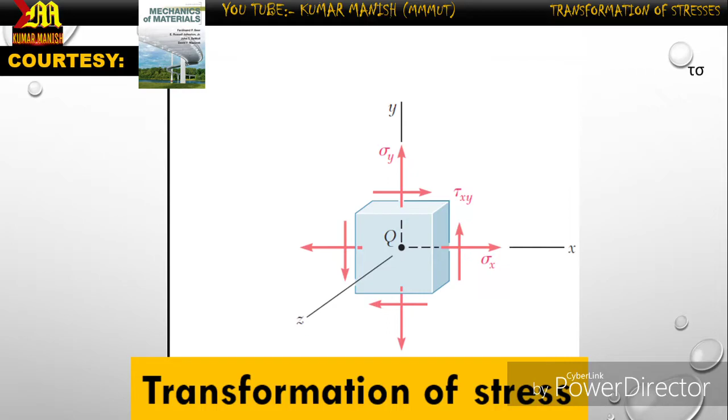हम एक स्मॉल एलिमेंट को कंसिडर करते हैं जो क्यूबिक बॉडी है। अब हम बात करते हैं शियर स्ट्रेस की। यदि हम बात करें नॉर्मल स्ट्रेस की, तो नॉर्मल स्ट्रेस जहाँ भी कहीं एक्ट होता है तो फेस के परपेंडिकुलर एक्ट होता है, और फेस के पैरेलल जब कोई स्ट्रेस जनरेट होता है तो उसको हम बोलते हैं शियर स्ट्रेस। जब हम मोहर सर्किल कंस्ट्रक्ट करेंगे या डेरिवेशन देखेंगे तो उसमें शियर स्ट्रेस के ओरिएंटेशन को कंसिडर करते हैं।

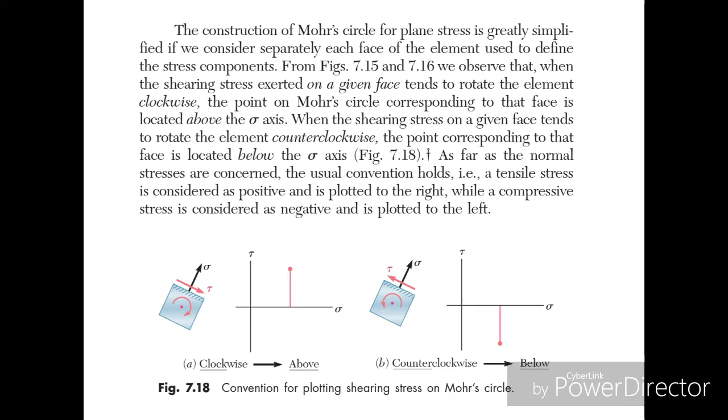शियर स्ट्रेस यदि क्लॉकवाइज रोटेशन में है तो वह पॉजिटिव लिया जाएगा, यदि एंटी क्लॉकवाइज रोटेशन में है तो उसे नेगेटिव लिया जाएगा। टाउ एक्स वाई की यदि हम बात करें तो इसका मतलब होता है शियर स्ट्रेस ऑन एक्स वाई प्लेन इन वाई डायरेक्शन, और वहीं पे टाउ वाई एक्स की बात करें तो शियर स्ट्रेस ऑन वाई एक्स प्लेन इन एक्स डायरेक्शन।

टाउ एक्स वाई सबस्क्रिप्ट में एक्स फेस को रिप्रेजेंट करता है और वाई डायरेक्शन को। यदि हम साइन कन्वेंशन की बात करें तो पॉजिटिव फेस पॉजिटिव डायरेक्शन, तो साइन कन्वेंशन पॉजिटिव लेंगे। पॉजिटिव फेस नेगेटिव डायरेक्शन तो साइन कन्वेंशन नेगेटिव लेंगे। A shear stress is positive when directions associated with its subscript are plus plus or minus minus, मीन्स यदि प्लस फेस है और प्लस डायरेक्शन है तो हम पॉजिटिव लेंगे, या नेगेटिव फेस है नेगेटिव डायरेक्शन है तो प्लस लेंगे। दूसरा केस क्या है कि द स्ट्रेस इज नेगेटिव व्हेन डायरेक्शन आर प्लस माइनस और माइनस प्लस। तो चलिए हम आगे बढ़ते हैं। इसी के साथ बात आ जाती है अब रोटेशन ऑफ प्लेन की।

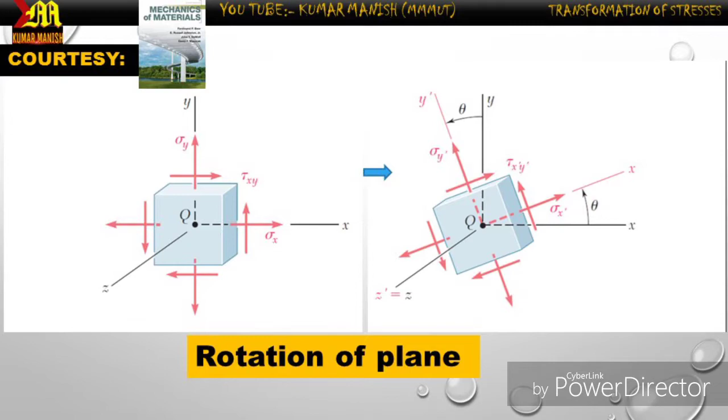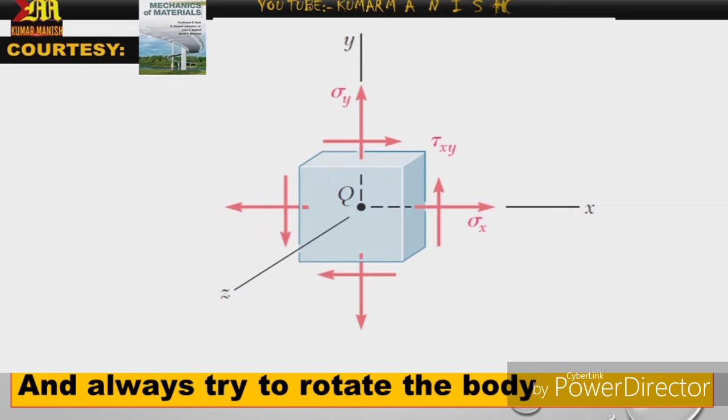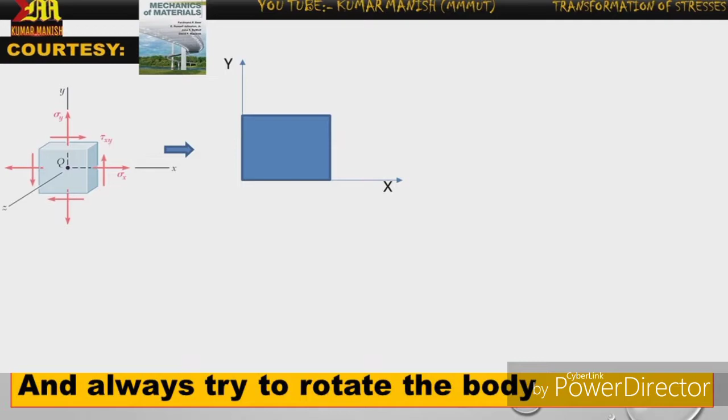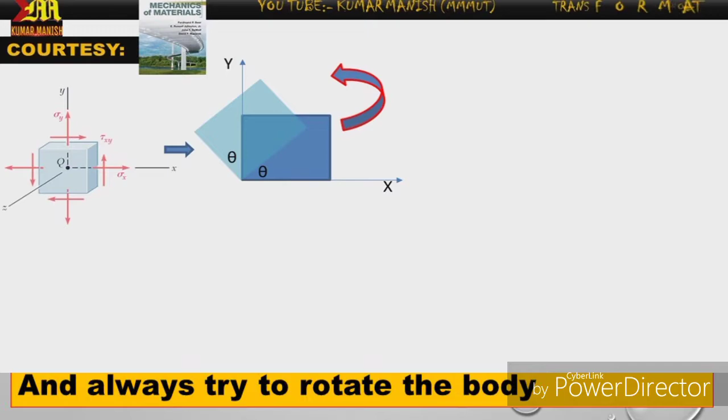यहाँ पे एक्स एक्सिस, वाई एक्सिस और जेड एक्सिस है। चूँकि यह 2D केस है, इसमें एक एक्सिस को, चाहे हम एक्स एक्सिस ले लें या वाई एक्सिस या जेड एक्सिस, किसी एक एक्सिस को हम कांस्टेंट मान लेते हैं। हम अपने इज़ी के लिए हमेशा जेड एक्सिस को ही कंसीडर करते हैं। तो जेड एक्सिस के अबाउट रोटेशन करा रहे हैं काउंटर क्लॉकवाइज डायरेक्शन में। तो जब हम काउंटर क्लॉकवाइज डायरेक्शन में रोटेशन कराते हैं तो हमारा जो स्टार्टिंग पोजीशन था वह एक्स ना होकर के एक्स डैश बन जाता है, और वाई जो होता है वाई डैश पे शिफ्ट हो जाता है। अब यहाँ पे एंगल बनता है थीटा।

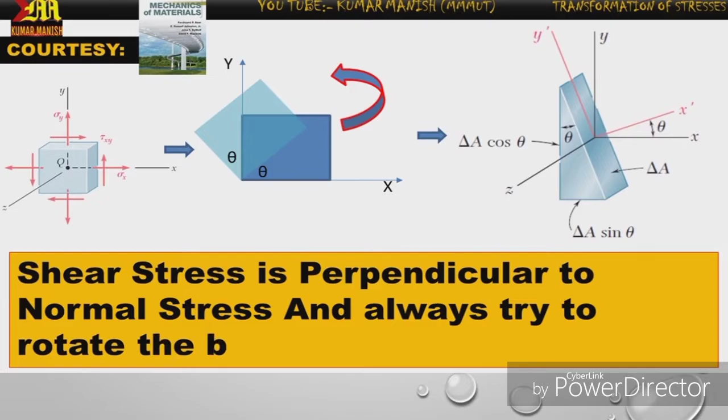अब हम कंसीडर करते हैं कि स्मॉल एलिमेंट को जो थीटा डिग्री पे कटा हुआ है। जब सिग्मा एक्स लग रहा था तो उस फेस का एरिया था ए, लेकिन जब ये थीटा डिग्री पे रोटेट हो गया तो इस टाइम इंक्लाइंड फेस को हम डिनोट करते हैं डेल्टा ए से। चूँकि ये थीटा डिग्री पे है तो इसका जो हॉरिजॉन्टल कंपोनेंट आएगा डेल्टा ए की वजह से, तो डेल्टा ए कॉस थीटा होगा, और वर्टिकल कंपोनेंट जो होगा डेल्टा ए साइन थीटा। अब कंसीडर करते हैं दूसरे पिक्चर को। यहाँ पे तीनों फेसेस पे लग रहे फोर्सेस को प्रेजेंट किया गया है।

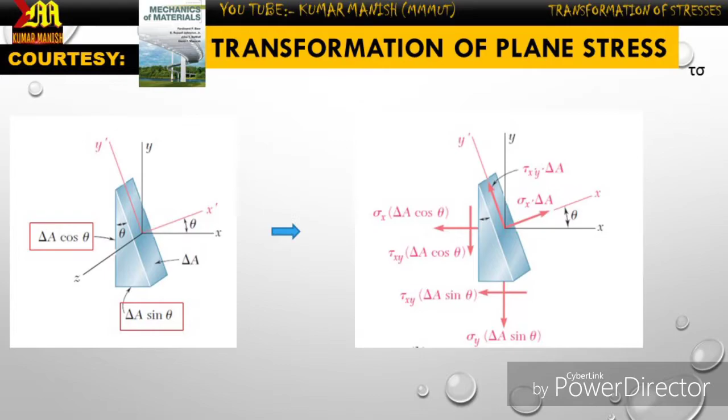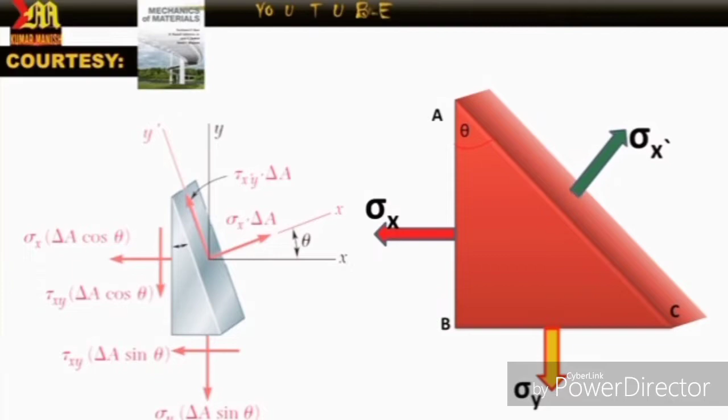फोर्सेस बराबर होते हैं स्ट्रेस इनटू एरिया, नॉर्मल स्ट्रेस इनटू एरिया। अब होगा आपको कन्फ्यूजन कि ये कैसे लग रहे हैं और कैसे रिजॉल्व किया गया है, तो हम इसको समझेंगे वन बाय वन करके। तो चलिए देखते हैं।

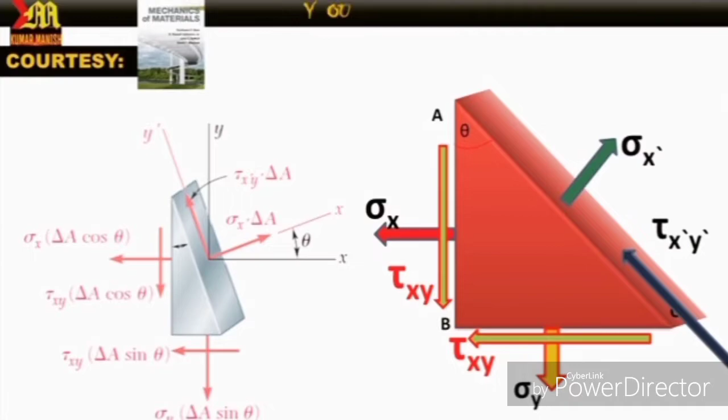फॉर नॉर्मल स्ट्रेस कंपोनेंट लेट अस कंसीडर फेस ए बी एंड बी सी। अब लेफ्ट साइड में लेफ्ट कॉर्नर पे जो छोटा सा इमेज दिया हुआ है, यहाँ पे थीटा एंगल कैसे बन रहा है इसको बताया गया है। अब यहाँ पे आप एनिमेशन शो हो रहा है, एनिमेशन में भी देखने की ज़रा कोशिश कीजिए।

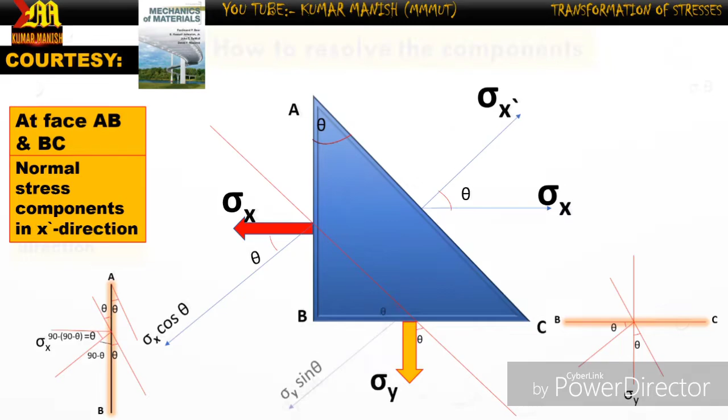यहाँ पे सिग्मा एक्स नॉर्मल टू द फेस ए बी है जो हॉरिजॉन्टल एक्स डायरेक्शन में है। चूँकि यहाँ पे एक्स डायरेक्शन थीटा डिग्री रोटेट होने की वजह से एक्स डैश में कन्वर्ट हो गया है, तो हम जो भी कंसीडर करेंगे हॉरिजॉन्टल, अब एक्स तो रहा नहीं, अब एक्स डैश में कन्वर्ट हो गया है, तो हम जो फोर्स को रिजॉल्व करेंगे वह एक्स डैश डायरेक्शन में और वर्टिकल कंपोनेंट वाई डैश डायरेक्शन में कंसीडर करेंगे।

तो हम देखते हैं यहाँ पे जहाँ पे सिग्मा एक्स कंसंट्रेटेड है, यहाँ पर हम देख रहे हैं कि फेस AC के जो इंक्लाइंड प्लेन है उसी के पैरेलल एक लाइन PQ दिया गया है।

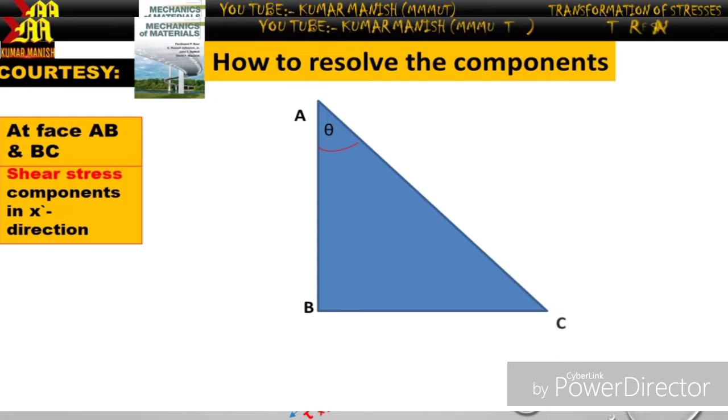Now shear stress components in x dash direction. Here you will see tau xy on the face AB acting downward along the face AB, and tau xy along the face BC. At face AB, tau xy makes an angle theta from the inclined surface AC. Shear stress tau xy acting on face AB in the x dash direction will be the vertical component, with value tau xy sin theta. Similarly on face BC it will be the horizontal component, tau xy cos theta.

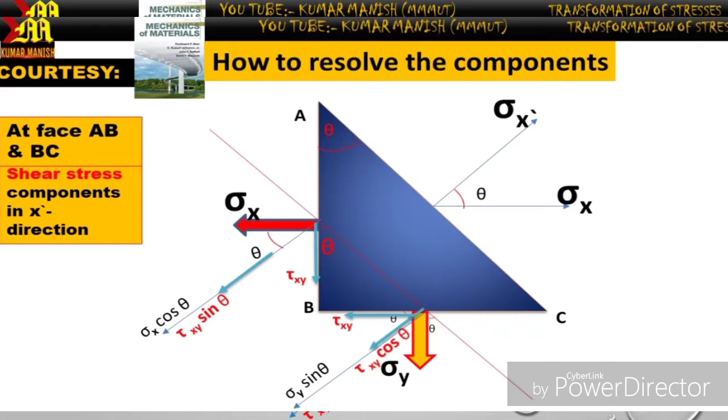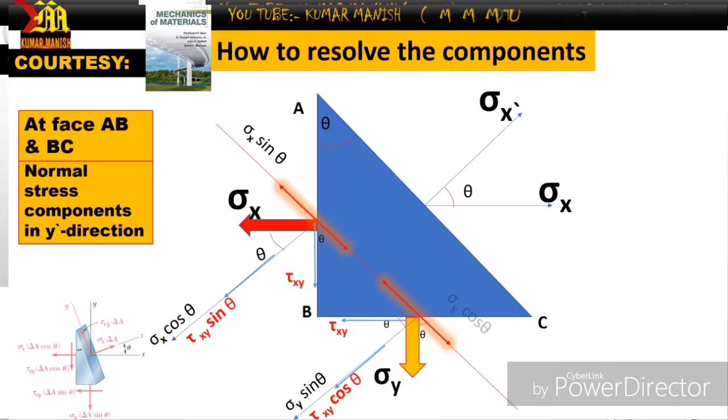Now again, normal stress components in y dash direction. Due to sigma x acting on face AB, in y dash direction it will be the vertical component with value sigma x sin theta. Similarly at face BC, due to sigma y in the negative y dash direction, it will be sigma y cos theta. Let us consider shear stress tau xy components in y dash direction.

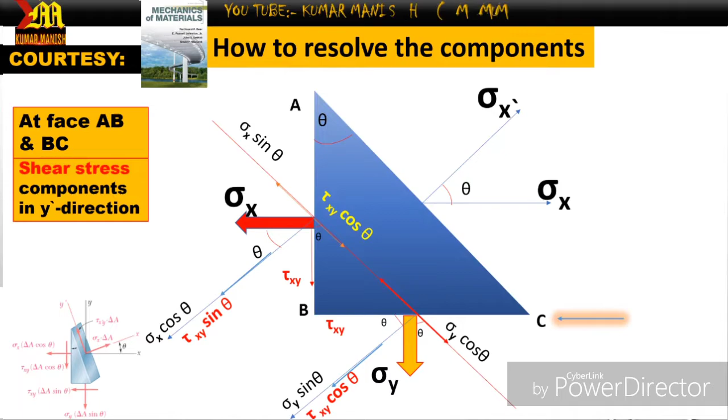Consider face AB where tau xy acts downward vertically at angle theta with inclined face AC, and it will have a horizontal component in the negative y dash direction with value tau xy cos theta. Similarly at face BC, tau xy acting towards negative x direction will have a vertical component in the positive y dash direction with value tau xy sin theta.

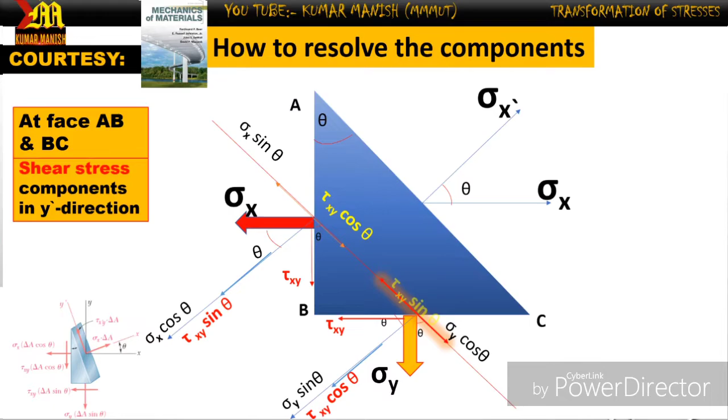The oblique face is denoted by del A. The areas of the vertical and horizontal faces are respectively equal to del A cos theta and del A sin theta. It follows that the forces exerted on the three faces are shown in the figure. No forces are exerted on the triangular faces of the element since the corresponding normal and shear stresses have all been assumed equal to zero.

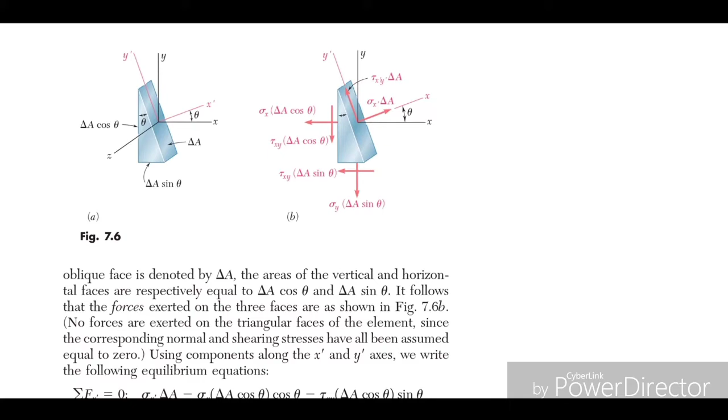Using components along the x dash and y dash axes, we can write the following equilibrium equations. This suggests that for equilibrium, the sum of all the algebraic forces will equal zero.

Let us consider at face AC, the inclined plane: sigma x dash del A in the positive direction. Similarly at face AB in the negative direction: sigma x del A cos theta into cos theta, minus tau xy del A cos theta into sin theta due to shear stress. At face BC due to sigma y: minus sigma y del A sin theta into sin theta, and due to shear stress tau xy: tau xy del A sin theta into cos theta, equal to zero.

And similarly in the vertical direction, the y dash direction, the summation of all the algebraic forces will be equal to zero for the equilibrium equation.

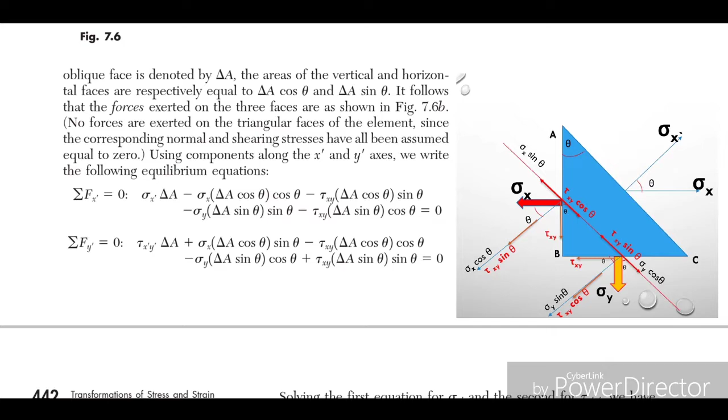Summation of Fy equal to zero means: tau x dash y dash del A plus sigma x del A cos theta sin theta, minus tau xy del A cos theta into cos theta, minus sigma y del A sin theta into cos theta, plus tau xy del A sin theta into sin theta, equal to zero. According to Cartesian coordinate convention, in the positive direction it will be taken positive, and in the negative direction it will be taken negative.

Solving the first and second equations, we will get sigma x dash, and the second for shear stress tau x dash y dash. The inclined area del A will be cancelled out. After simplifying, we can easily obtain: sigma x dash equal to sigma x cos square theta plus sigma y sin square theta plus tau xy sin theta cos theta, two times.

Again, tau x dash y dash equals minus sigma x minus sigma y into sin theta cos theta, plus shear stress tau xy cos square theta minus sin square theta.

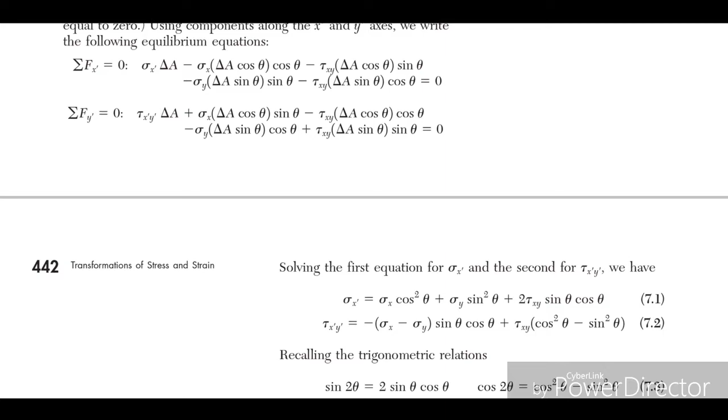Consider the trigonometric relationships: sin 2 theta equals 2 sin theta cos theta, and cos 2 theta equals cos square theta minus sin square theta. After resolving this, cos square theta equals 1 plus cos 2 theta over 2, and sin square theta equals 1 minus cos 2 theta over 2.

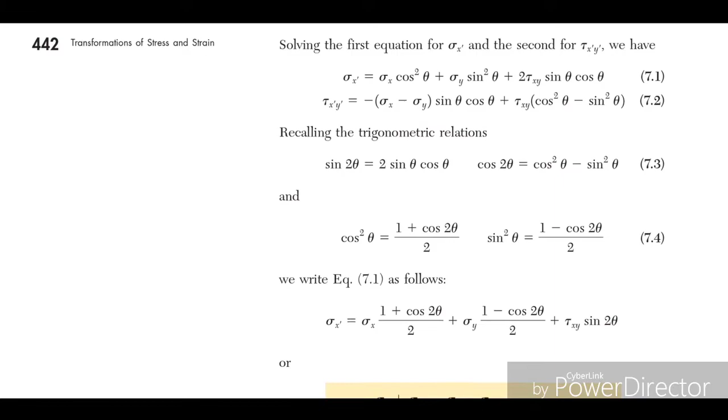Now, sigma x dash equals, in the place of cos square theta we can assume 1 plus cos 2 theta by 2, plus sigma y times 1 minus cos 2 theta by 2, and tau xy sin 2 theta. After simplifying, we get sigma x by 2 plus sigma x cos 2 theta by 2, and sigma y by 2 minus sigma y cos 2 theta by 2, plus tau xy sin 2 theta.

After simplifying, we see that sigma x dash equals sigma x plus sigma y by 2, plus sigma x minus sigma y by 2 cos 2 theta, plus tau xy sin 2 theta.

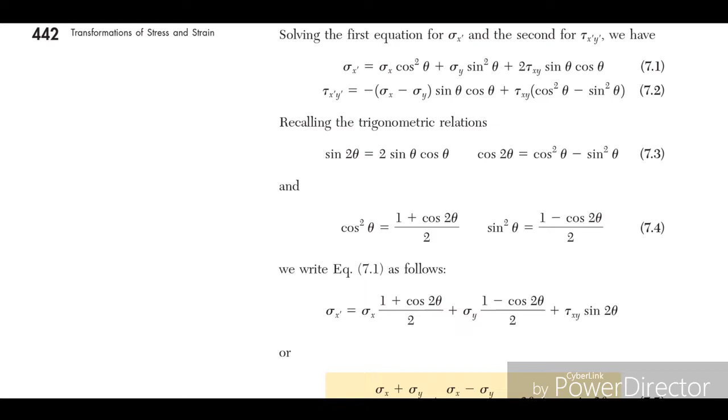Consider equation 7.2: tau x dash y dash, the shear stress at the inclined plane at angle theta, has the value minus sigma x minus sigma y sin theta cos theta, plus tau xy cos square theta minus sin square theta.

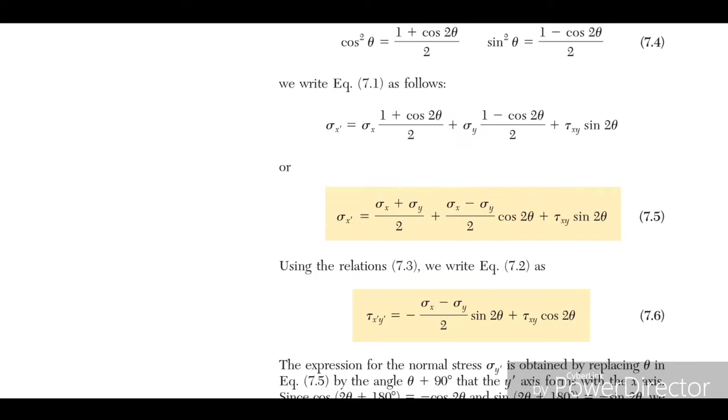This is converted into tau x dash y dash equals minus sigma x minus sigma y by 2 sin 2 theta, plus tau xy cos 2 theta, because cos square theta minus sin square theta equals cos 2 theta, and sin theta cos theta, if we multiply numerator and denominator by 2, easily gives sin 2 theta, meaning sigma x minus sigma y by 2 into sin 2 theta.

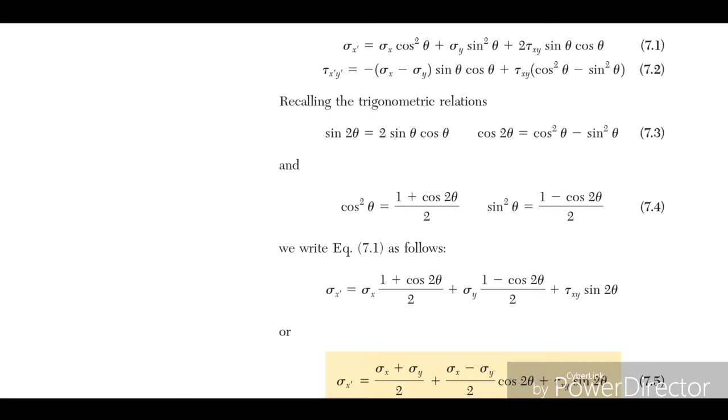The expression for the normal stress sigma y dash is obtained by replacing theta in equation 7.5 with the angle theta plus 90 degrees, because we took the cubic element, and at the edge of the cube it takes 90 degrees. If we rotate theta degrees, it will shift theta plus 90 degrees.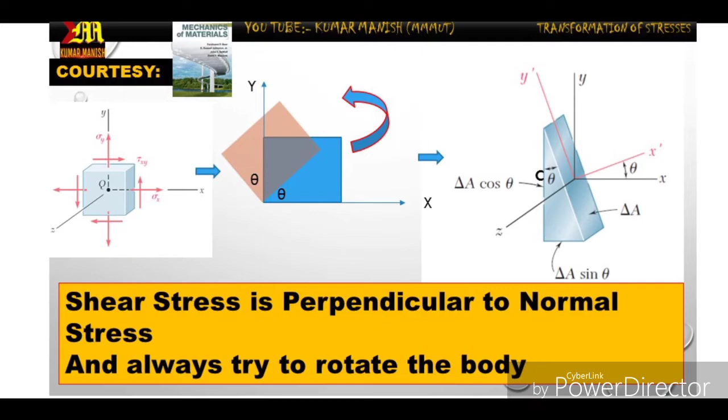So it is theta plus 90, that is the y dash axis forms with the x axis. Since cos 2 theta plus 180 degrees means minus cos 2 theta, and sin 2 theta plus 180 degrees equals minus sin 2 theta, we can replace these easily and get the value of sigma y dash.

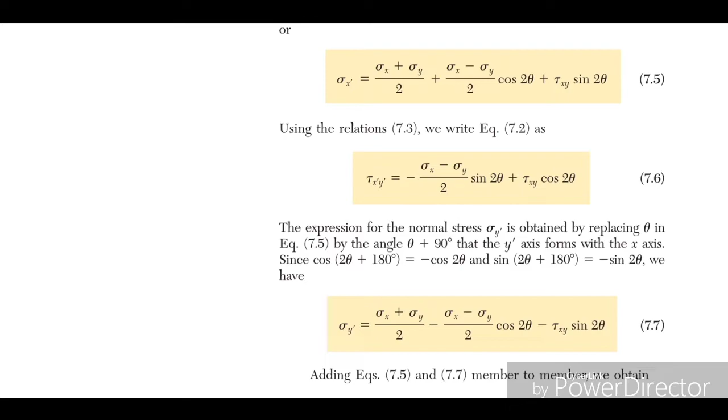This is sigma x plus sigma y by 2, minus sigma x minus sigma y by 2 into cos 2 theta, minus tau xy sin 2 theta.

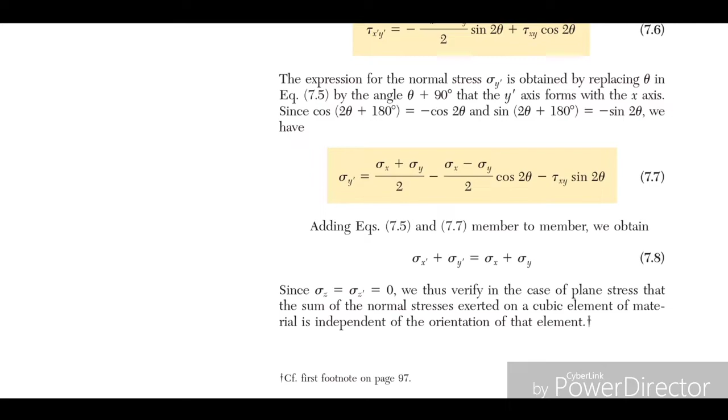Since sigma z and sigma z dash are 0, we thus verify that in this case of plane stress, the sum of the normal stresses exerted on the cubic element of material is independent of the orientation of that element.

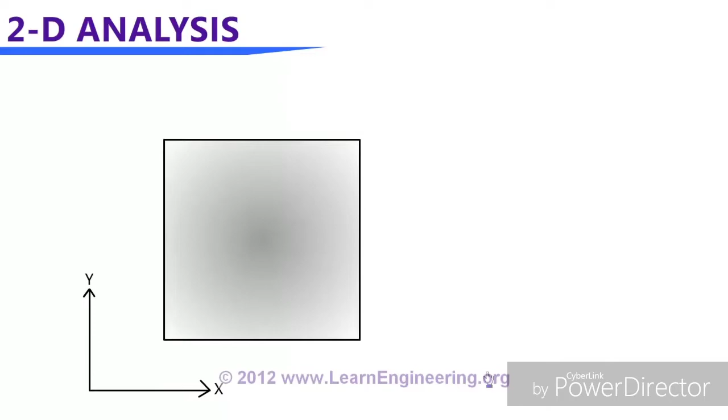Two-dimensional stress analysis: this is a two-dimensional object where we have to do stress analysis, and stresses acting on the boundary of this object are a normal stress along the x direction, sigma x, another normal stress along the y direction, sigma y, and finally shear stresses on four planes of the body, tau xy.

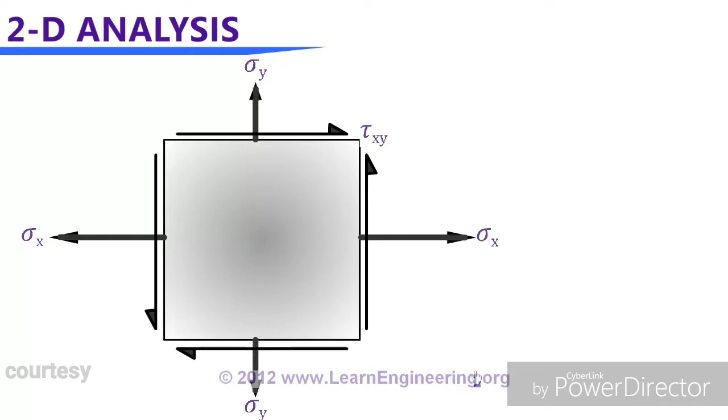Now in a stress analysis, what you have to determine is the stress at any plane inside the body. The plane can be this or this, anything like this. You have to find a plane at angle theta with the vertical dotted line, and determine what the shear stress and normal stress are at this plane.

You could evaluate these two quantities using simple force balance, but that method would be too tedious for engineering problems. The most effective and easy method for this purpose is a graphical method known as Mohr's Circle analysis. Let's see how we can use Mohr's Circle analysis to solve this problem.

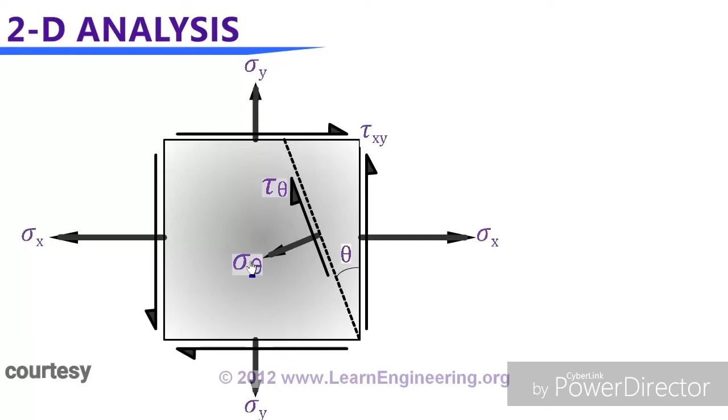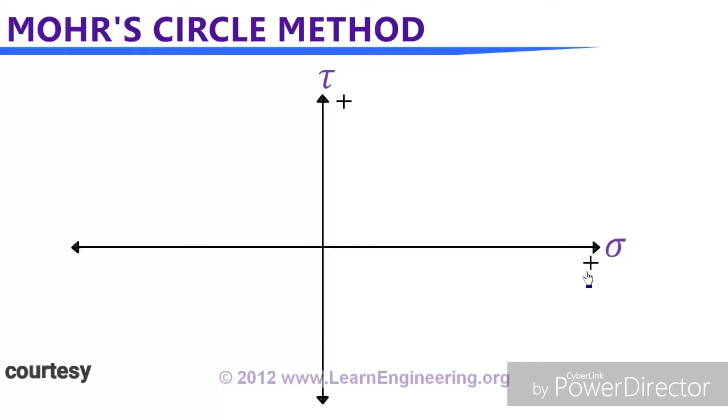First step in Mohr's Circle method: draw two axes, one for normal stress, horizontal, and another for shear stress, vertical. The positive direction of the axes are shown here, and negative will be in the opposite way. Second step, mark the normal stress values you have for the problem over the horizontal axis.

You have got two normal stress values for this particular problem, so mark values of that over here. Please note the sign convention: if stress is tensile in nature, we should mark it in positive axis, and if it is compressive in nature, we should mark it in negative axis. For this problem, both stresses are tensile, that's why we mark it on positive axis.

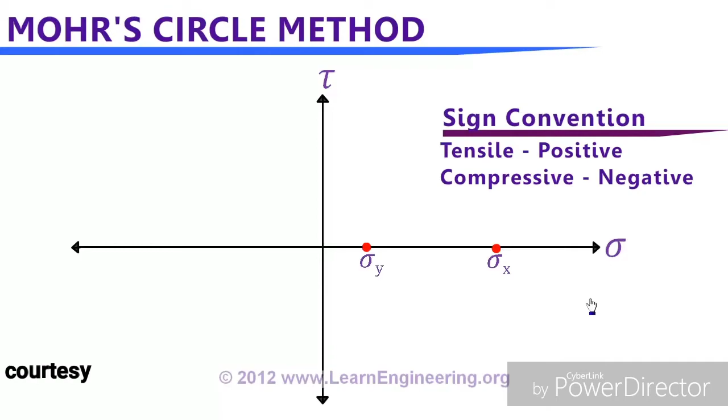Now the third step: draw shear stress values parallel to the vertical axis, starting from the already marked normal stress values. About sign convention of shear stress values, if shear stress tends to rotate the body in clockwise direction, it will be drawn as positive value, and if it tries to rotate the body in anti-clockwise direction, it will be marked as negative value. In our problem, on the y plane, shear stress was trying to rotate the body in clockwise direction, that's why I marked it in positive way, and the opposite is true for the other case.

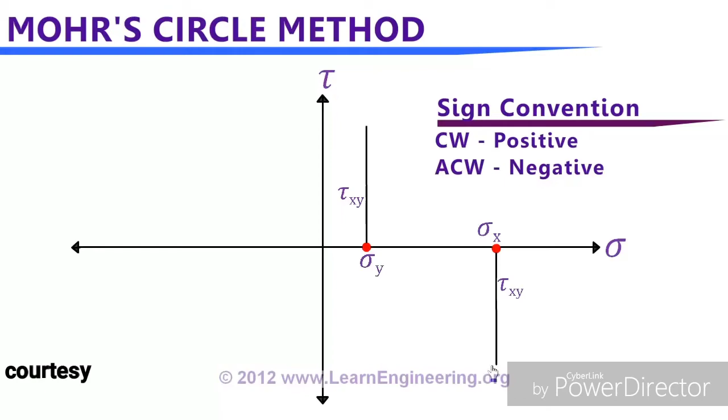Now the fourth step: draw a line connecting the end of shear stress lines, like this. Now the final step of Mohr's circle construction: draw a circle assuming that the newly drawn line is the diameter of a circle. So it will be like this, and this circle will be known as Mohr's circle. A Mohr's circle represents the complete stress state of a two-dimensional object, meaning on the periphery of the circle you can locate shear stress and normal stress values of a two-dimensional object.

Now the information designers wanted: maximum normal stress and maximum shear stress values. You can easily note from this Mohr's circle that normal stress is maximum at this point, so this will be a principal stress value, and this plane will represent the principal plane. It will be denoted like this, we are denoting it by sigma 1, and maximum principal stress is on this plane. About the angle of the principal plane, if we take half of this angle, that will be the angle of the principal plane in the actual body.

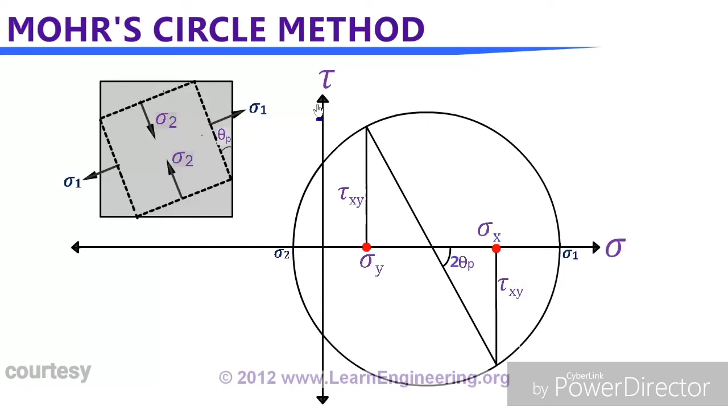Now design second requirement: maximum shear stress value. You can easily note that maximum shear stress occurs at this point, and this will be the maximum shear stress value. So it will be represented like this, here it is. The value of this shear stress will be the same as the radius of the Mohr circle, and you can easily represent it as the difference between sigma 1 minus sigma 2, that will be the diameter of the circle, and by 2, so radius of the circle.

This is all about two-dimensional analysis, so let's move to the 3D problem.